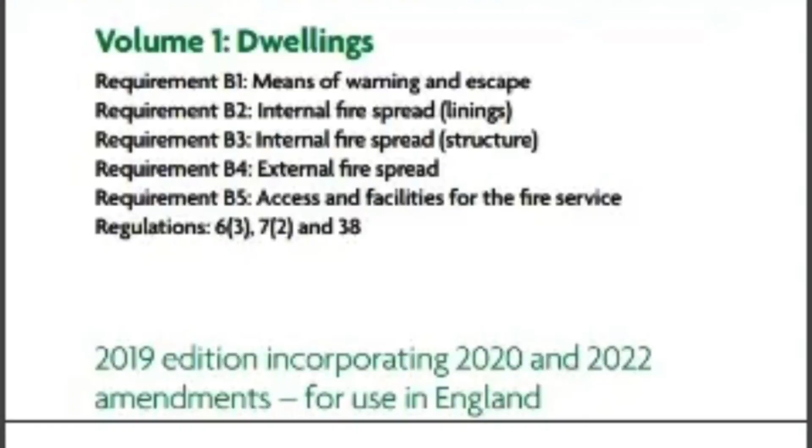Because of this disaster, the Building Regs Document B has been changed, so subsequently the gas regulations have changed, so we will need to follow those when we are installing gas appliances or pipework into multi-occupancy buildings. Now, inside this grey door here is the gas meter cupboard for this block of flats. So let's have a look here.

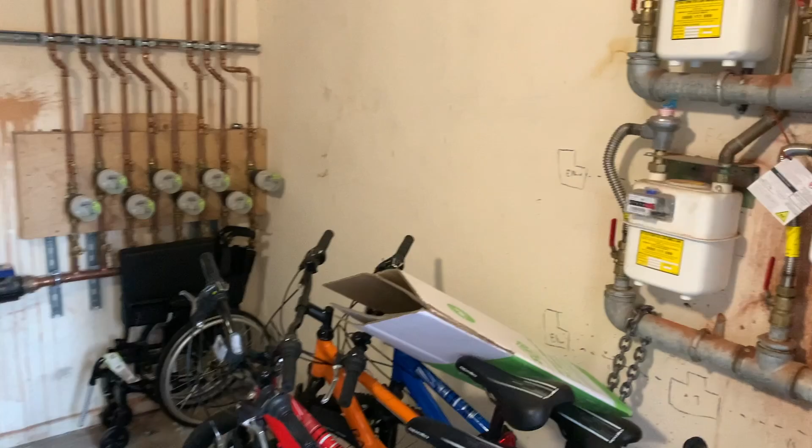Now, the first thing you notice about this door is there are no signs whatsoever on it to say that there are a load of gas meters behind this door. So the fire brigade wouldn't know the meters were here, or neither would our ESP or any meter readers. So first thing, now the door has to be lockable, which it is. And because it's lockable, anybody who has a meter in here requires a key to be able to get into this meter cupboard for their meters.

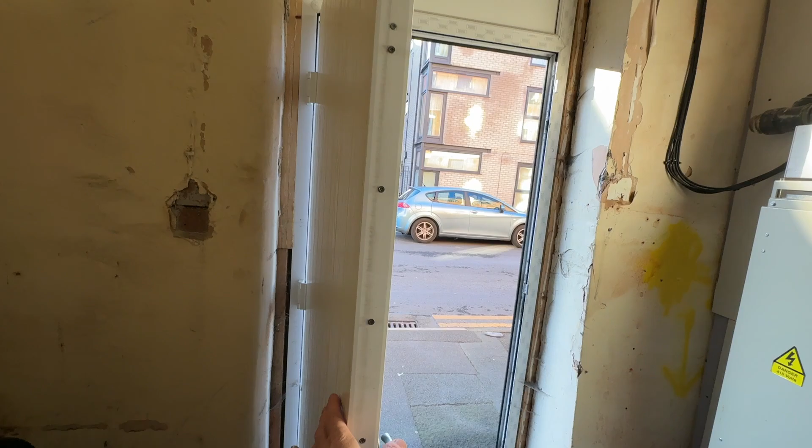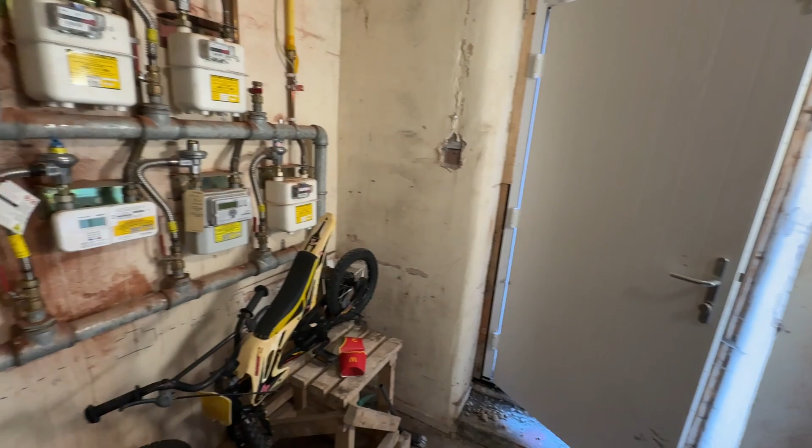As well as being lockable, this door has to be self-closing. As you can see, it's not self-closing. Also, in this wall here, we require ventilation. So let's have a look and see what size vents and how we work out the ventilation for this gas meter cupboard. Now, there are 2 ways of working out this ventilation for the compartment, cupboard, whatever you want to call it for the gas meters.

Now, the first way you can do it is 2% of the actual floor area. But if you don't really know the floor area, then they say you can use this chart, which they call the notional floor area, or you're guessing. So, first thing is, if we've got 2 gas meters, it says our notional floor area must be 0.5 meters squared per meter. So if we've got 2 meters, then that means we'll need 1 meter squared of floor area.

Now, 2% of this 1 meter squared, this is the way I worked it out. If you can think of an easier way or a better way, then stick it in the comments down below. Maths isn't my strong point, neither is English. But anyway, so this is the way I did it.

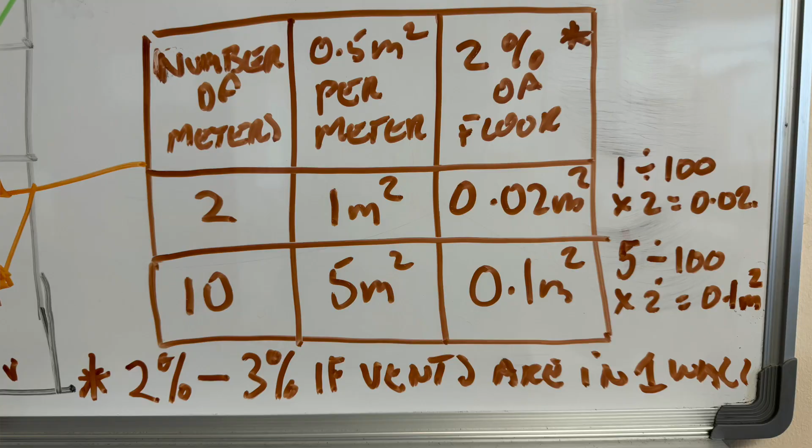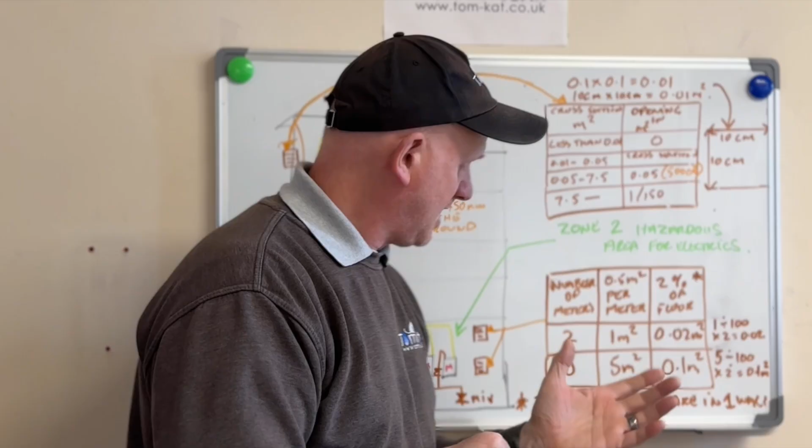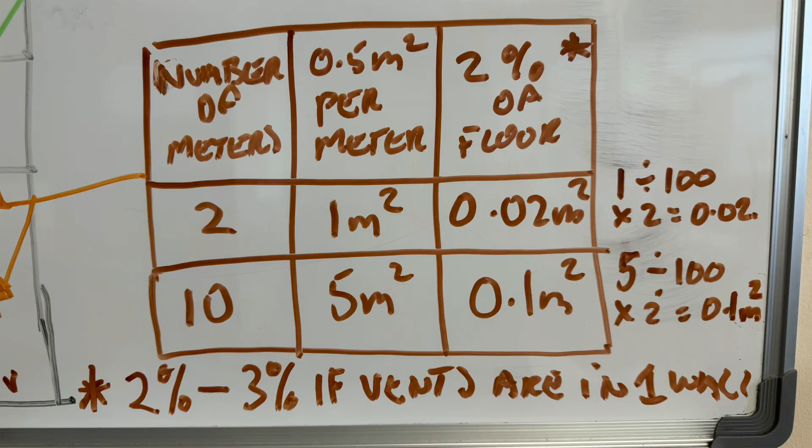1 divided by 100 times by 2 gives us 0.02 meters squared of free air. And then this can be split between these 2 vents. Or, say we had 10 gas meters, then we would do 0.5 meters squared per meter, which is 5 meters squared. Then we would do 5 divided by 100 times by 2, which would give us 0.1 metres squared of free air, which we would split between the two vents, top and bottom.

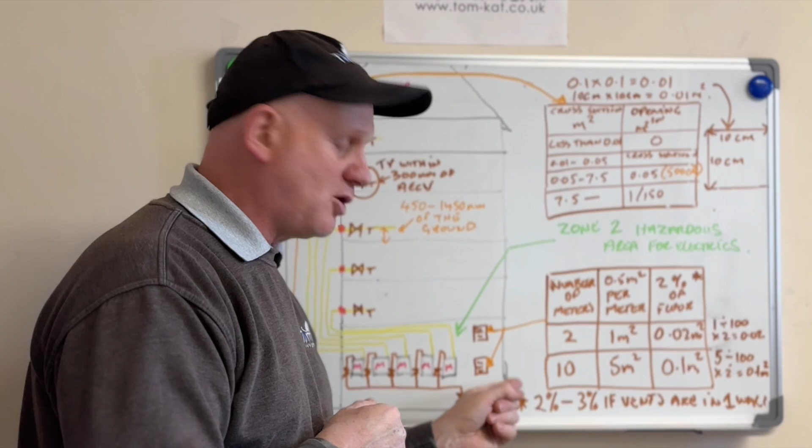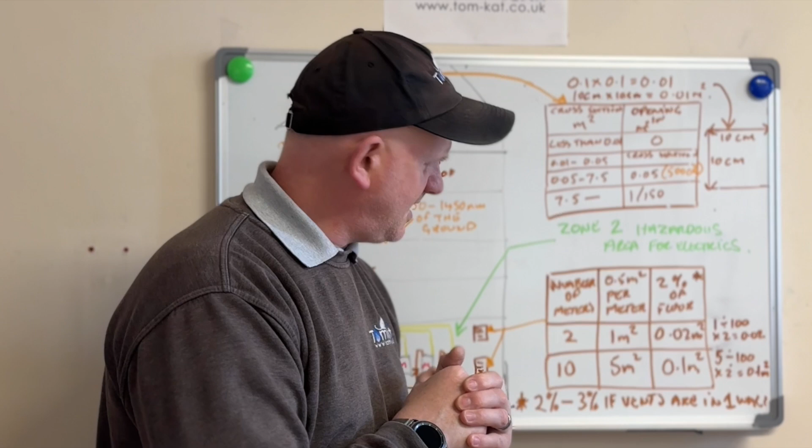Now, it does say if you can't get 4 vents, one in each wall, it then says up it from 2% to 3%. So if you've only got vents in one wall, up it to 3%. Now, hopefully, that makes sense.

Now you can see flat 6 is written on this meter, but if we go to this meter, there's nothing written on it. For some reason, there's a 94 on there, so that could be going to, I don't know.

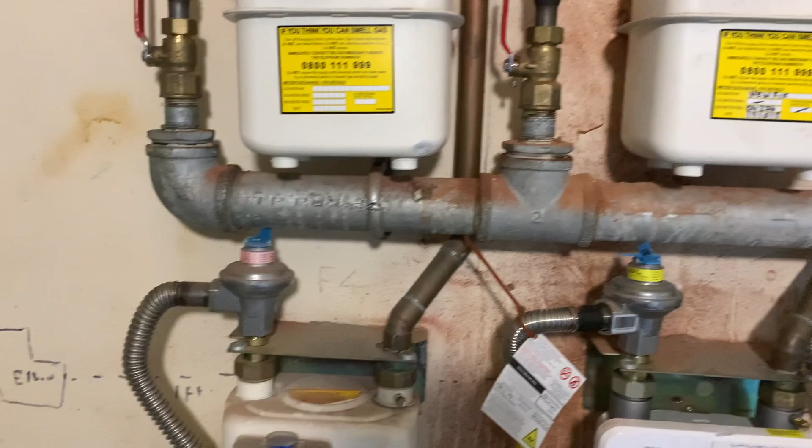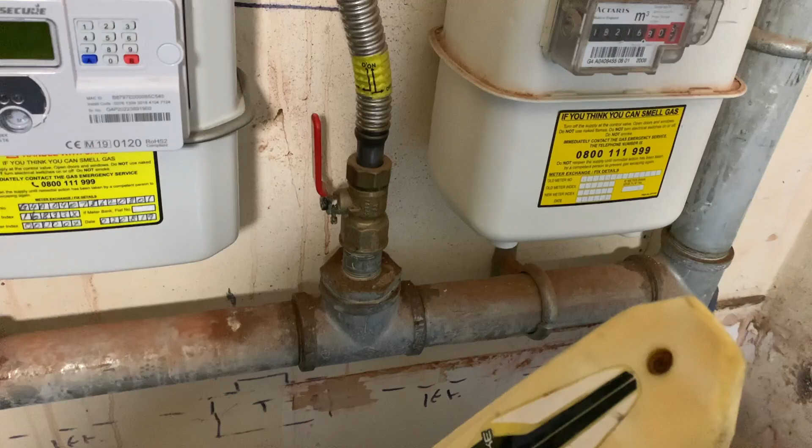Nothing on there, nothing on there, nothing on there, and nothing on there. There's actually nothing written on here except for that one flat to say which meter belongs to each flat. So each ECV should be marked up saying whose flat it belongs to, but there's nothing. There's no line drawing, there's no information, there's nothing on here saying any information whatsoever.

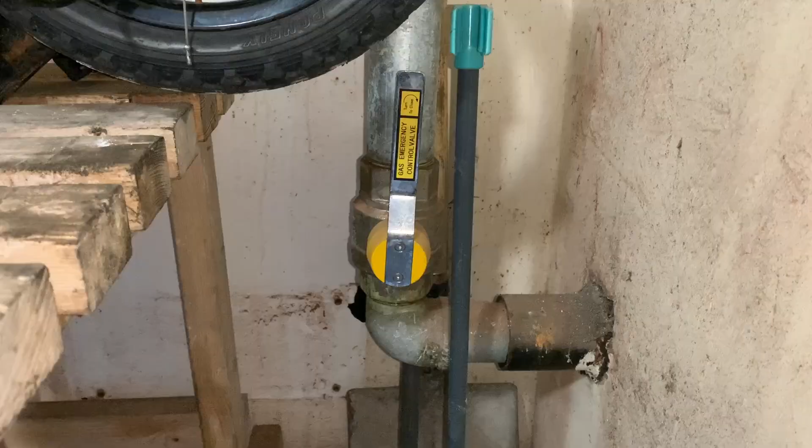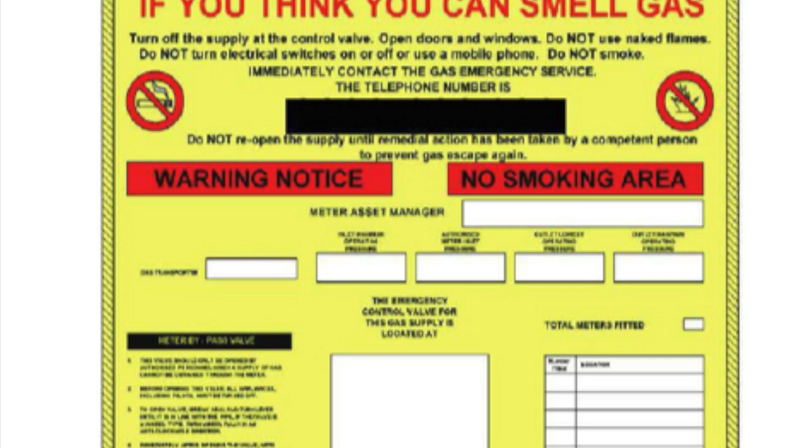So this is the meter inlet valve coming up to feed the bank of meters, but there are no signs whatsoever around here to give any information about the meter bank itself like there should be. So this is a good example of a comprehensive composite notice found in IGEM G5. The label for the bank of meters shall be placed in a prominent position and should be within sight of the meters and the ECVs.

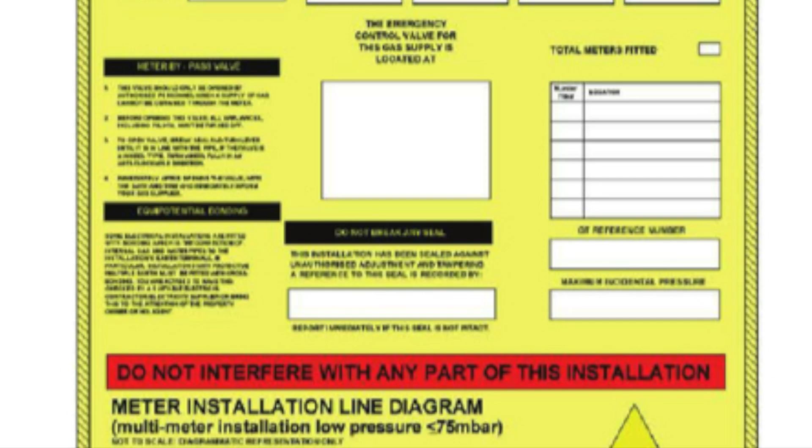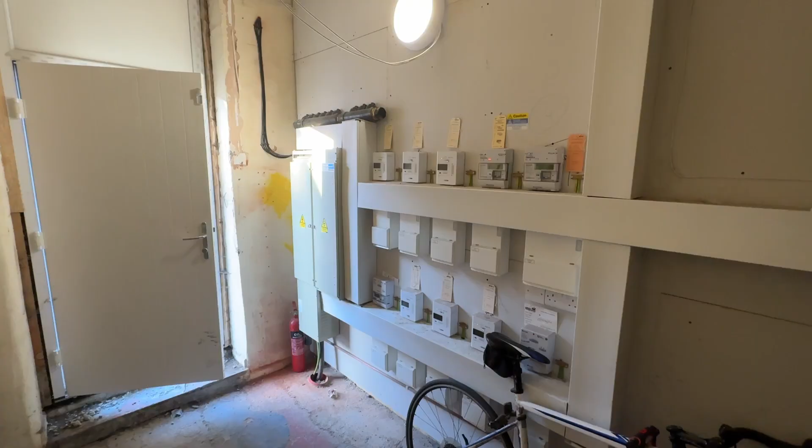The label should be provided with the following information on it: actions to be taken in the event of a suspected gas escape, a line diagram, the gas pressures, the equipotential bonding, the security seals, and no smoking and gas escape labels. Now you can see there's also a load of electric meters in this gas cupboard.

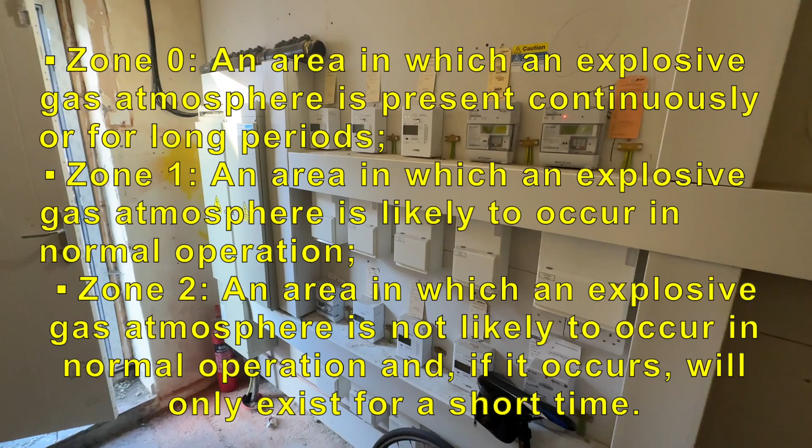So this electric side of it has to comply with zone 2. Now I ain't no electrician and I don't know whether all this complies to being able to be installed in zone 2 or not. So if you do know, let me know in the comments below.

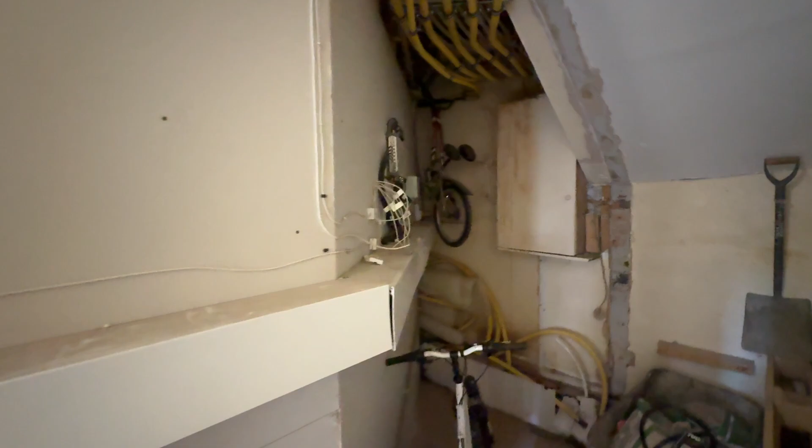But as you can see, the fire stops for this room are not very good. So you can see it's not sealed down the side there. We've even got bits of plasterboard missing, and the plasterboard isn't skimmed, so it isn't fireproofed anyway. And if we look round here, at the top here, I don't know whether you can see that, but let's go there, it's actually missing. So the fire resistance for this room is not that good.

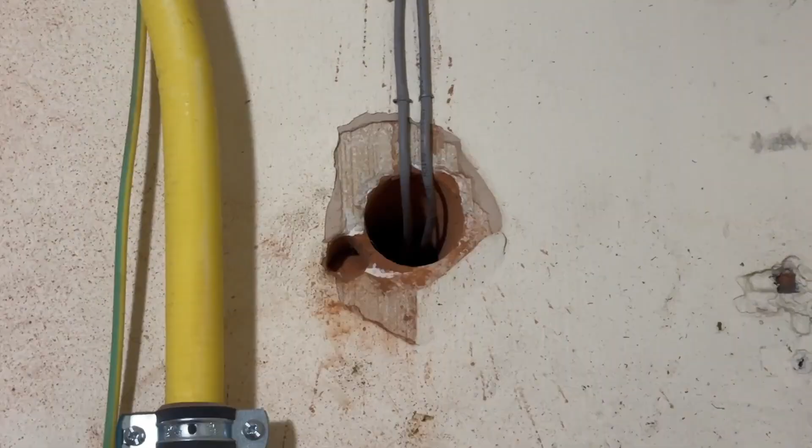And as you can see, some of the tenants like to leave their bikes in here. Can you use it as a store cupboard? I think not. And the water meters are also here as well, with the pipe going through. Now you can see there is an electric cable going through the wall there, which isn't fire stopped. There are more electric cables up there, again, which are not fire stopped, going through this room into the corridor.

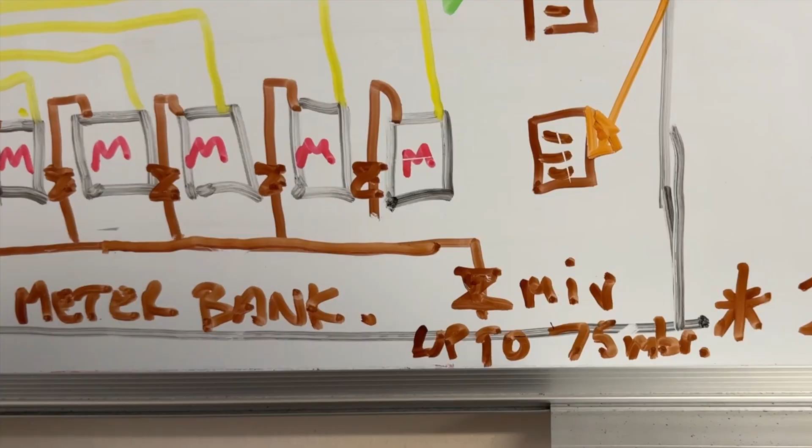Now let's take a look at the installation of the pipework and the meters. Now the first thing, the main coming in from the street should have an isolation valve on the inside of the meter cupboard. So this is what's called the meter inlet valve. There should also be one in the street as well, so you can isolate it in the street and here to turn off the meters. Also, because this meter bank is going to be internal, the incoming supply here from the street can only be low pressure, so up to 75 millibars, and not medium pressure.

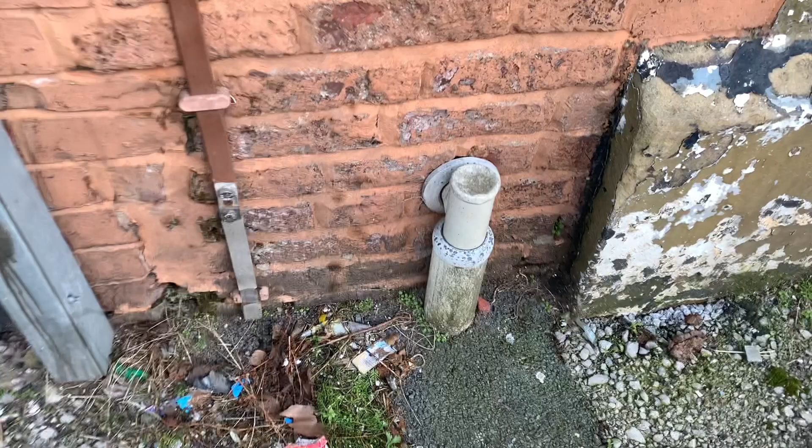So that is the main entry tee coming in, and if we follow the dug up bit, we can see there actually is a little access panel to get at the isolation valve in the street. So that's correct. Now when you've got 2 or more meters in a row, they're called a bank. So this is a bank of meters.

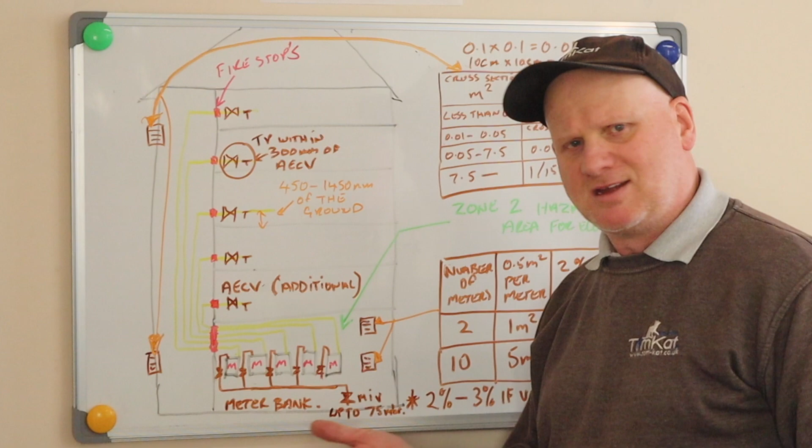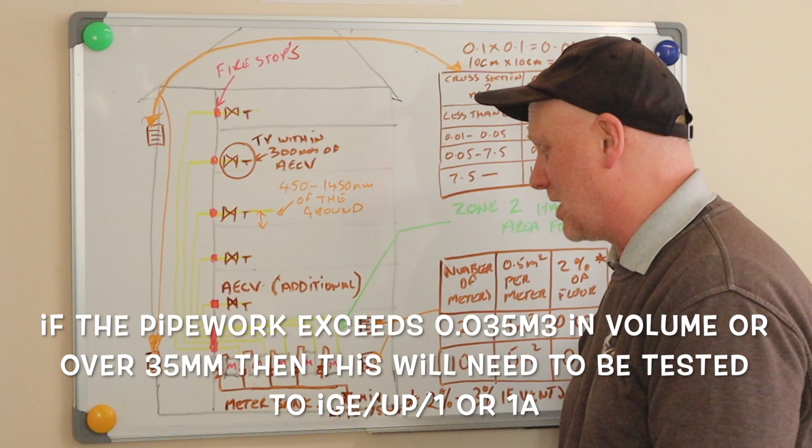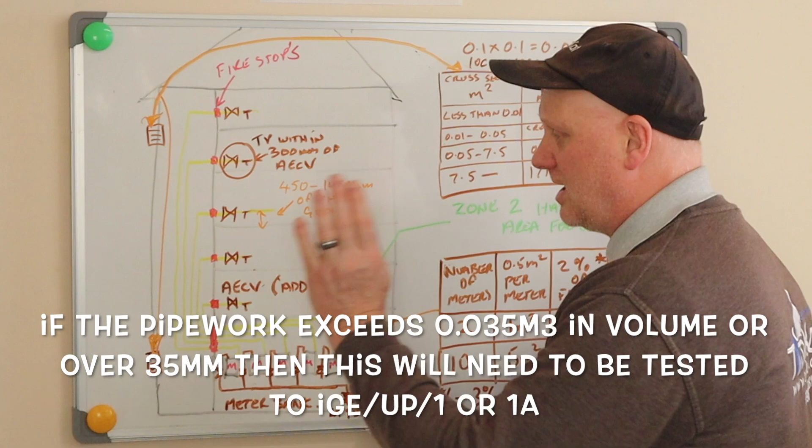So this pipework coming in here would be sized by the supplier, and the rest of the pipework here going through to the flats would be sized by the gas engineer doing the installation, or somebody who designs gas pipe installations. So this will say is sized correctly pipework coming off the meters and going off into a ventilated void on the side of the property. So the pipework comes through the main wall.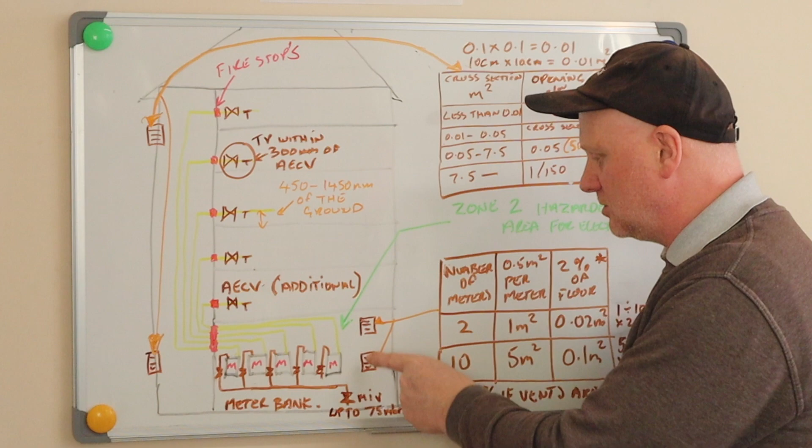Now this needs to be fire stopped, and also this room needs to be sealed, so if there was a gas escape then it wouldn't go through to any of the flats, it would just go through the ventilation which we've looked at.

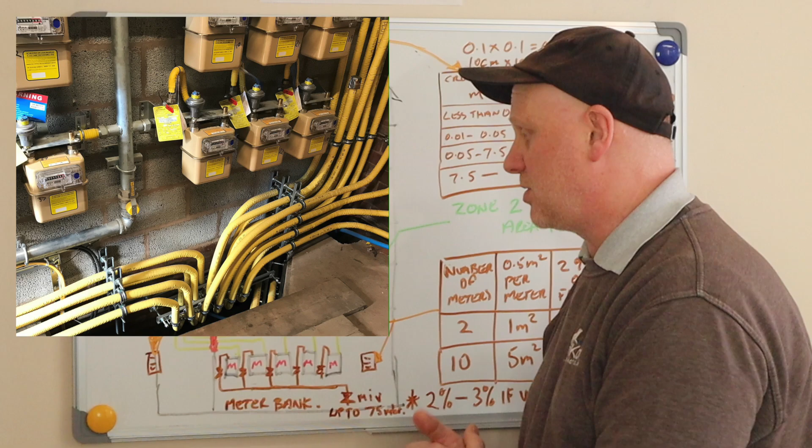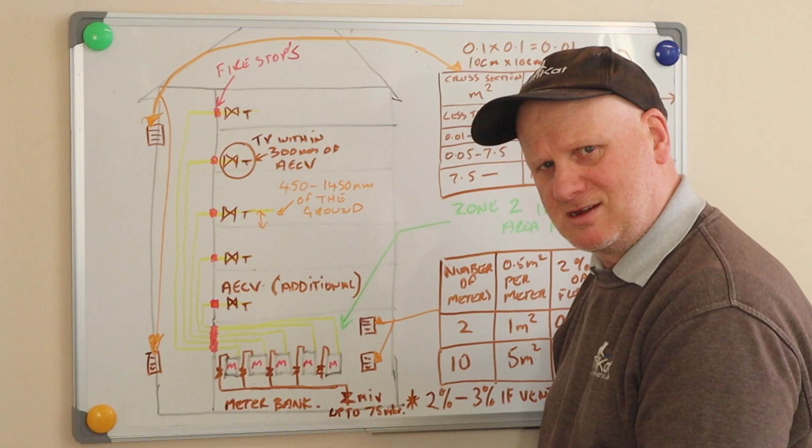So this pipe going through into this void, because once it's installed you wouldn't be able to get at it normally, it would have to be made of steel, which can be screwed or welded, or it could be made of corrugated plastic coated stainless steel tube, because it would be one continuous piece. Well, technically you could get away with copper if there was no joints in it. So I think in this installation you'd struggle. Anyway, we'll look at the sizing of the vents in this shaft a little later on.

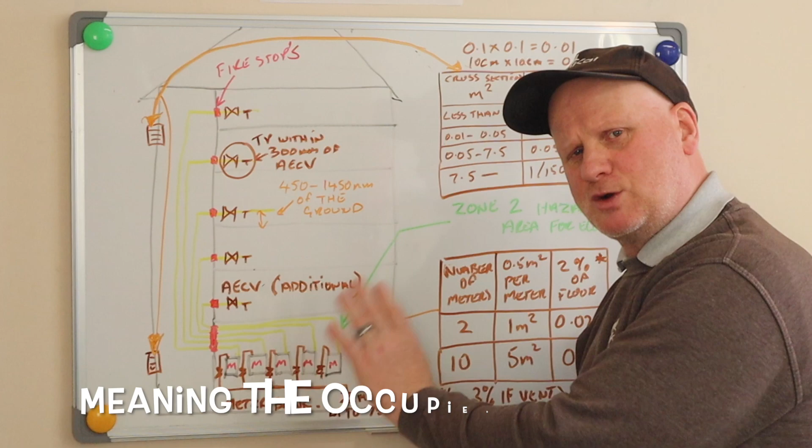Now, when the pipework comes into the flat, again, it needs to be fire stopped. Straight after as it comes in, it needs an AECV, or an additional emergency control valve. So you will have an emergency control valve still at the meter, but you will need an additional one in the flat.

Now, if they have 24-hour access to the ECV here at the meter bank, then if they haven't got an AECV, you would advise them to have one fitted. But if they didn't have 24-hour access to the ECV, then no AECV would be deemed at risk. Okay?

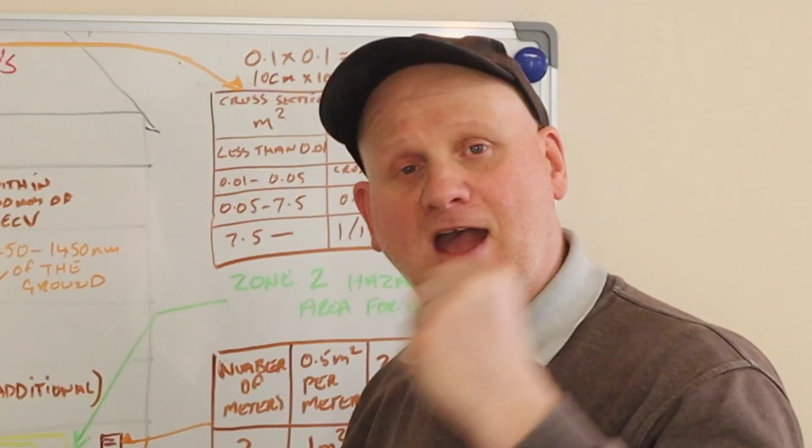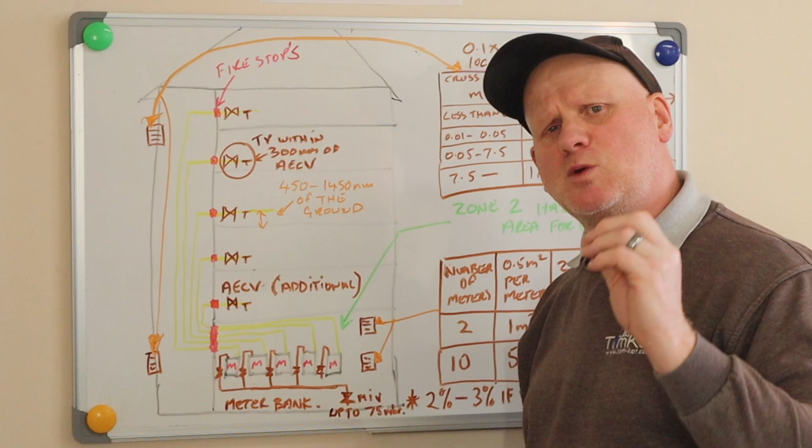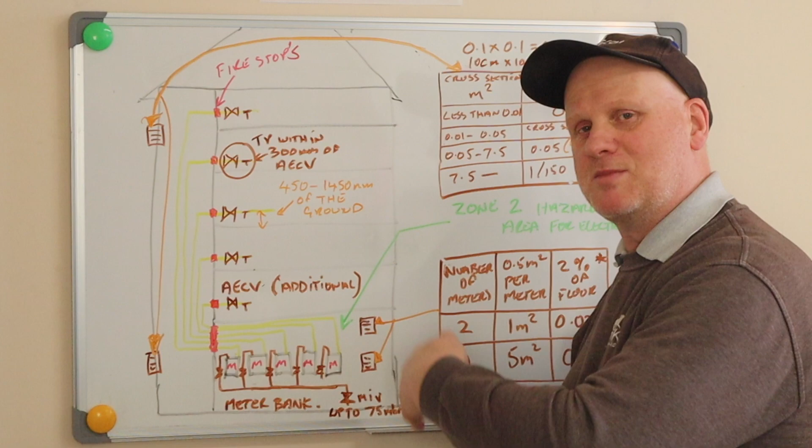Straight after the AECV, or within 300 mil of the AECV, we will require a test point. And that is, you could actually do a tightness test from there and test the house or the flat. So you could do one at the meter, or you could do one at the AECV. So it would make it easier to find leaks. So if you did have a drop here, then you could isolate these two and see if it's here, or whether it actually is in the flat.

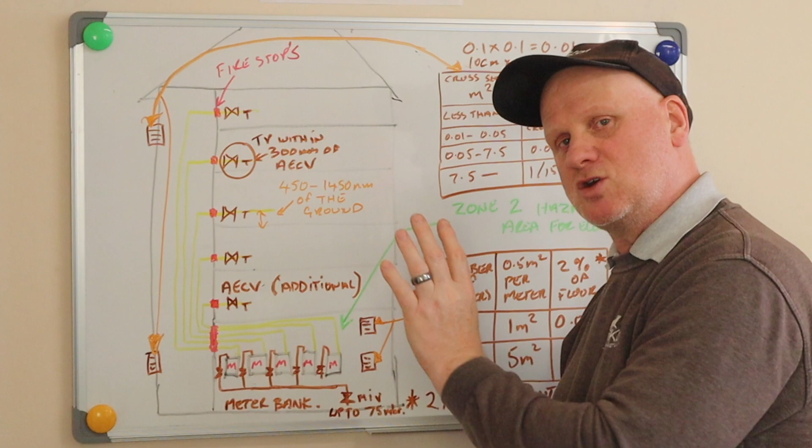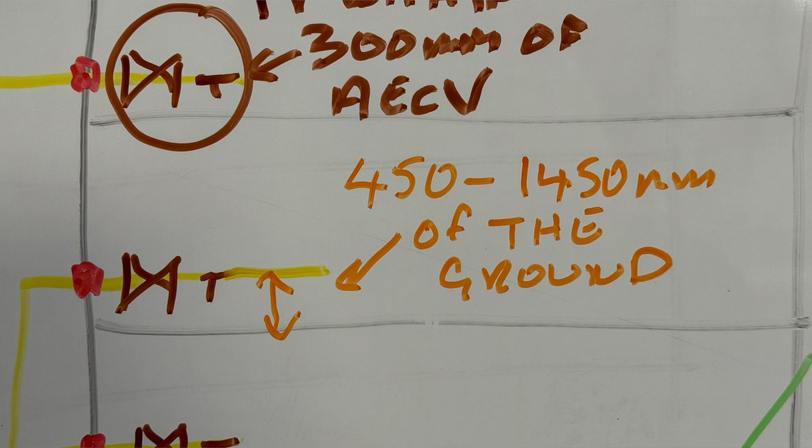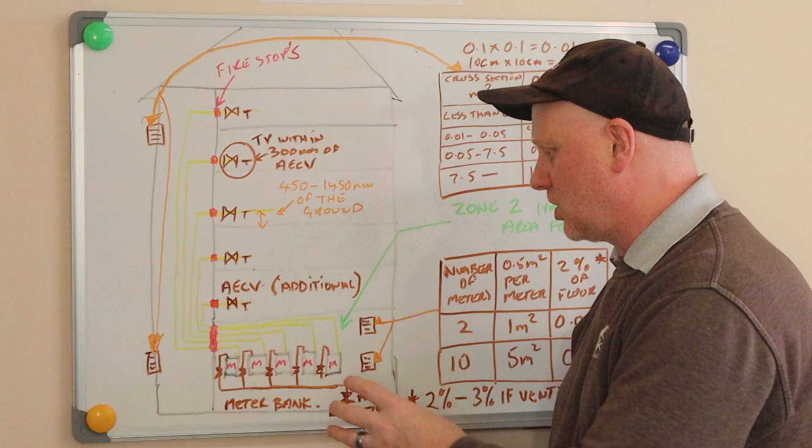Now, as well as the test point being within 300 of the additional emergency control valve, the siting of this emergency control valve is also important. It should be as soon as it enters the flat, or as practical as it can be coming into the flat. It needs to be within 450 and 1450 of the floor, because obviously if it's too low you're not going to be able to turn it off, and if it's too high you're not going to be able to turn it off. So that is the requirements for the pipework going into the flats from the meter bank.

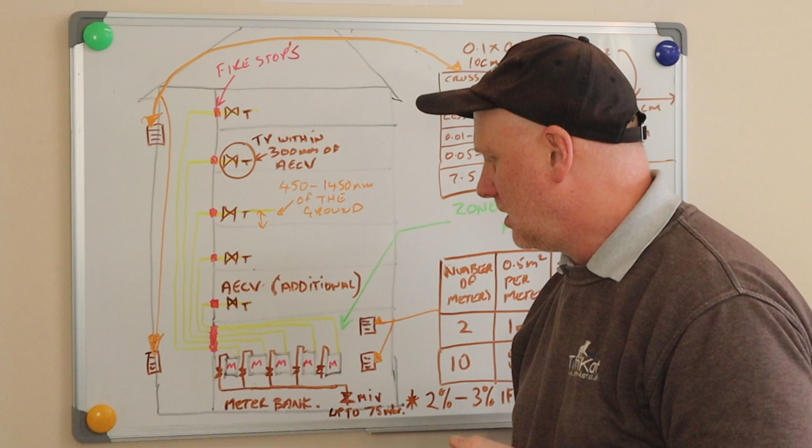Remember, this would need to be sized correctly, and this could end up being oversized for a domestic engineer to work on there, but if you did have your AECV in there, they could work back from that way. So hopefully that makes sense.

So what can we use as a fire stop then? Well, if a soil pipe or a waste pipe passes through multi-occupancy buildings, there are specially designed fire stops for them. Because the pipe is made of plastic, as the plastic melts, the fire stop expands. We also have the same with vents as well. We can have intumescent vents which do the same thing. As they're melting, they expand and they close off.

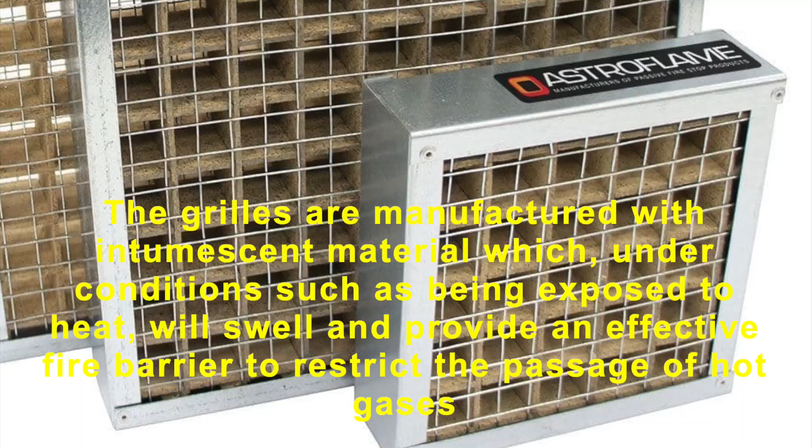But we have this stuff, flue jointing compound. So we can use this on the inside of meter boxes when the pipe passes through the back. This is the stuff we're supposed to be using. Now this will go up to 250 degrees centigrade, and it does say on the tin here it can be used as a pipe seal when a pipe passes through a wall.

I can't think of anything else you could use. High temperature silicone, would you be using that? Again, it probably depends on the temperature and whether local building control will allow it for a fire stop. But at the moment, that's the only thing I can think of to use for a fire stop.

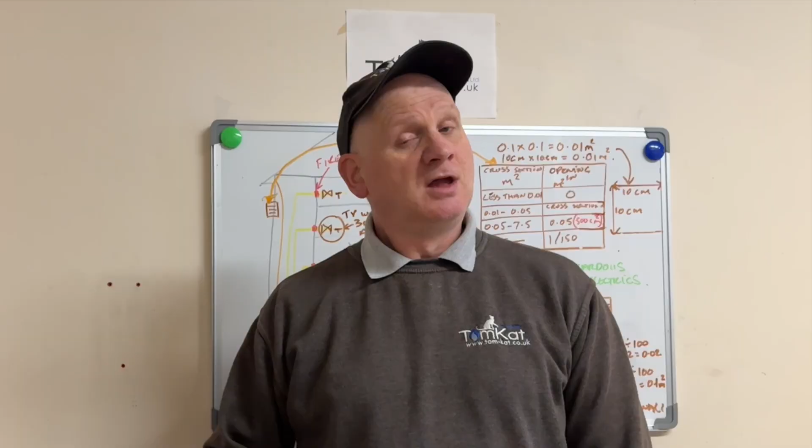So this has got double protection. So if this pipe did leak, it would then pass through the outer sleeve and then go back into the meter cupboard where it's ventilated, or should be ventilated, and people would then be able to smell it also. So that is what's meant as a pipe system for this corrugated stainless steel tube. Now, another way this can be achieved using the standard corrugated stainless steel tube, so the one that isn't the pipe system, is you could use this stuff.

So this is a flexible sleeve which would have to run the full length of the gas pipe, but the volume of this can't exceed 0.1 meters cubed. So there you go. That's one way of doing it.

Now, one product you cannot use in a ventilated duct or a sleeve is this. So this is gas MDPE, and this cannot be run inside the building. This is for underground purposes only. So don't think you're going to get a cheap fix by using this instead of using this pipe system.

My advice to you would be always contact your local building control before you're running a gas pipe in a new development. Make sure it complies, and always use this kind of stuff with the pipe system. There's quite a few manufacturers of this corrugated stainless steel pipe system now, and you can pick the one that suits you the best. So bear that in mind.

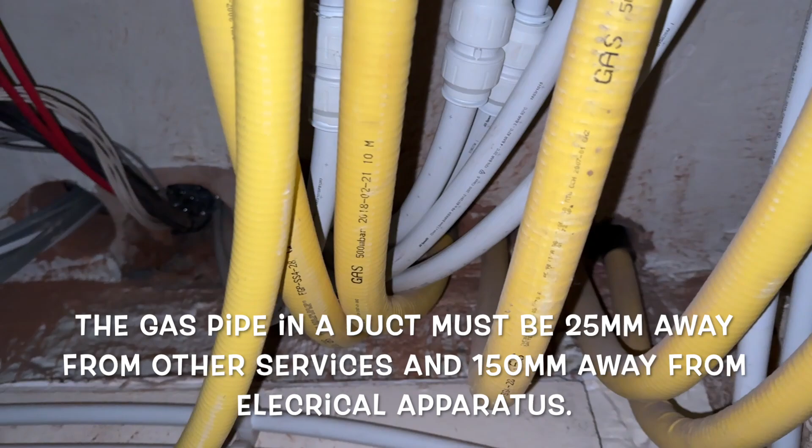So hopefully you can see here, this is where the TracPipe goes into the ducting, and also there's wires going in through the ducting as well. So are they fire stopped? No, they're not. Now this is the main staircase and landing and lobby for these flats. So this is what's called a protected area.

So any gas pipe installed within the stairwell, the lobby or on the landing must be in a fireproof protected shaft, which is ventilated direct to outside. Now, the TracPipe we saw downstairs is installed in this boxing in, which you can see is not ventilated at all.

Now, if this pipe is steel, screwed or welded, and continuous copper, or TracPipe, what they could have done is just put vents here, top and bottom, because this area, because a high volume of traffic comes here, they call it an occupied area. So if it was to leak, people would smell it. But also what they could have done was put two vents here, and also this wall here is an outside wall, so they could put vents in there as well.

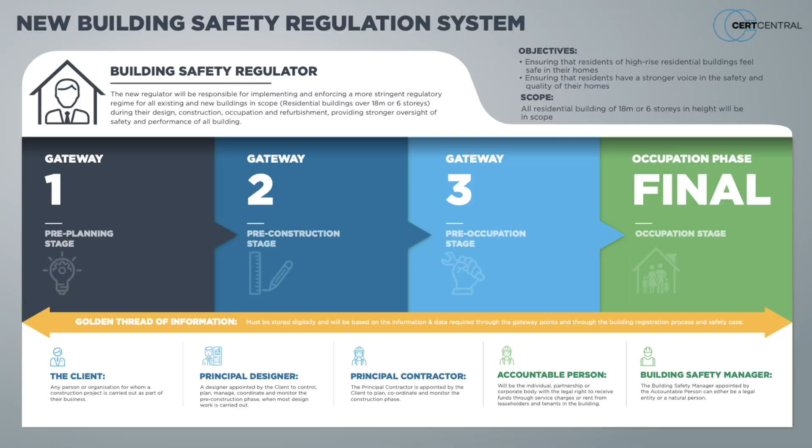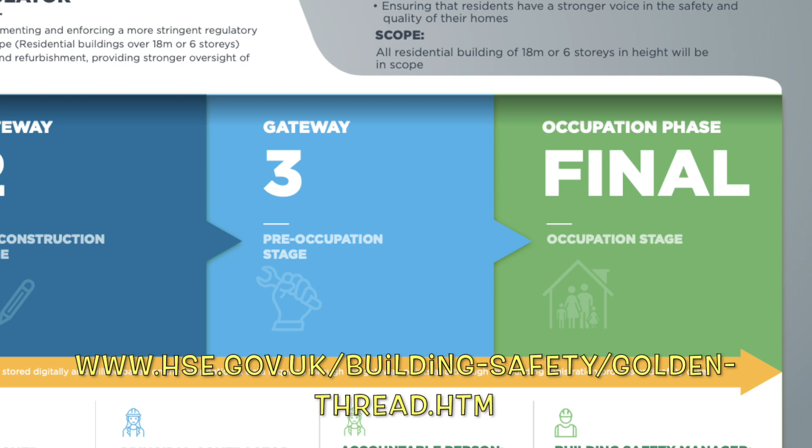Now, if you're unsure about any of the regulations required when you're installing gas pipes into flats, especially in the protected areas such as stairwells, lobbies and landings, then you can ask the accountable person for the golden thread information on the property. So what is this golden thread thing then? The golden thread involves keeping a digital record of crucial building information, starting from the design phase and continuing through the building's life cycle. The government have decided that the golden thread of a building's information must be stored digitally, but this can be on multiple systems.

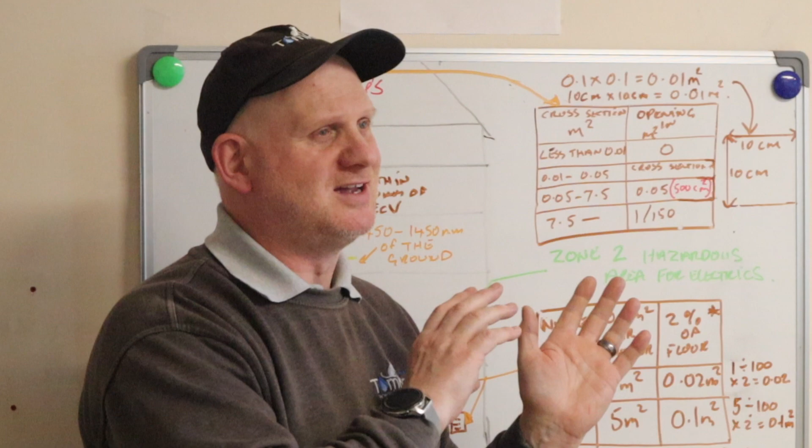Now let's have a look at sizing these vents in this pipe duct. Now, one thing to bear in mind is the ventilation we're actually sizing is not there to get rid of the gas if we have an absolute failure of the gas pipe, so catastrophically failing. It's only there if you've got like a small gas leak, so it allows the gas to escape and so people can smell it.

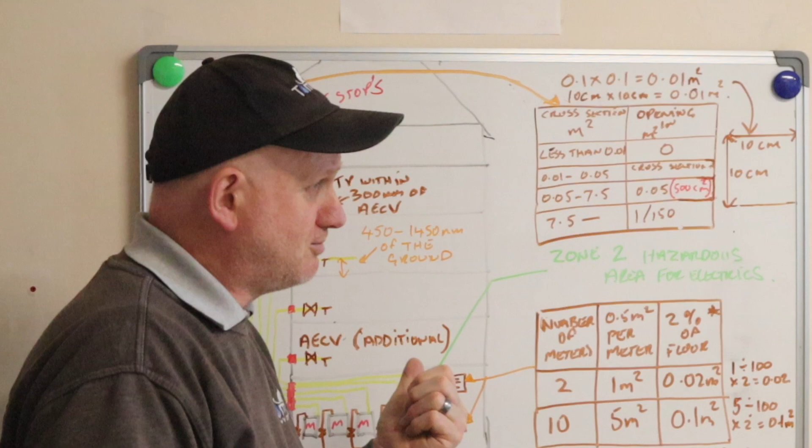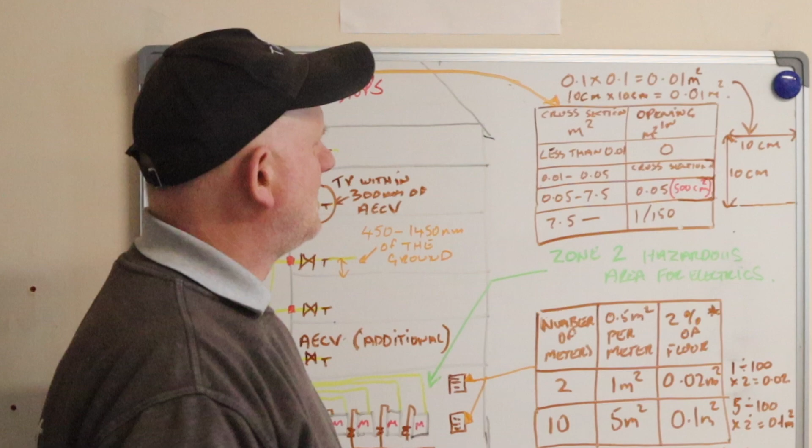The same goes for the vents here as well. This isn't designed for if there was a catastrophic failure of the gas in this meter compound, cupboard, whatever you want to call it. It's just there to warn people and hopefully stop an explosion. Anyway, this is how you do it. Now, for some reason, one, we do it off the cross-sectional area of the duct, and two, they've done it in meters squared.

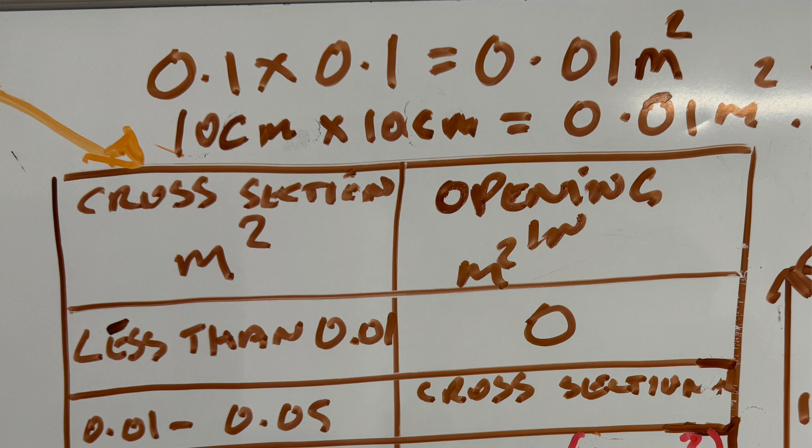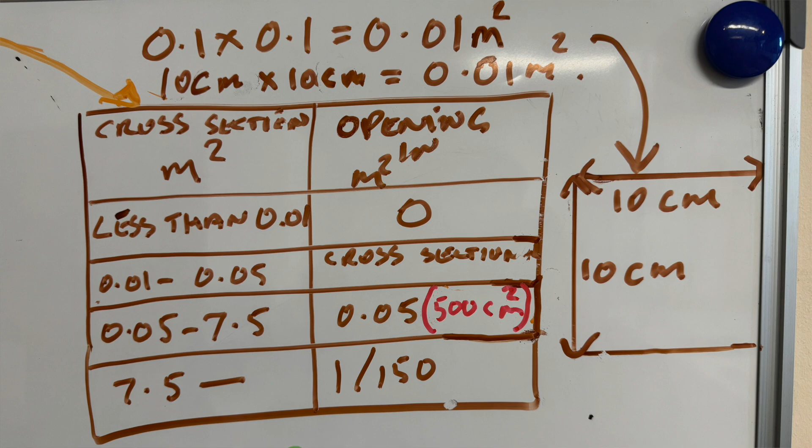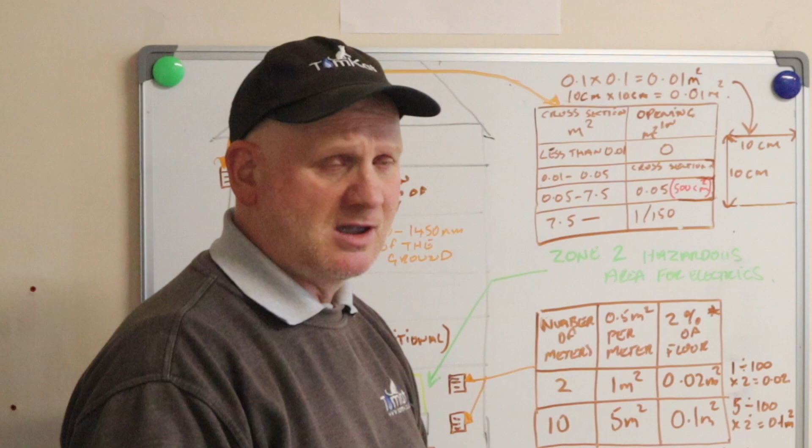Anyway, if your duct is less than 0.01 meters squared, then you don't need any ventilation. But how big is 0.01 meters squared? Well, technically, it's a little box which is 10 centimetres by 10 centimetres, or 100 mil by 100 mil. So that is actual size. So if your pipe duct is bigger than that, you're going to need ventilation. Now remember, it's not the length of the duct, it's the cross-sectional area of the duct.

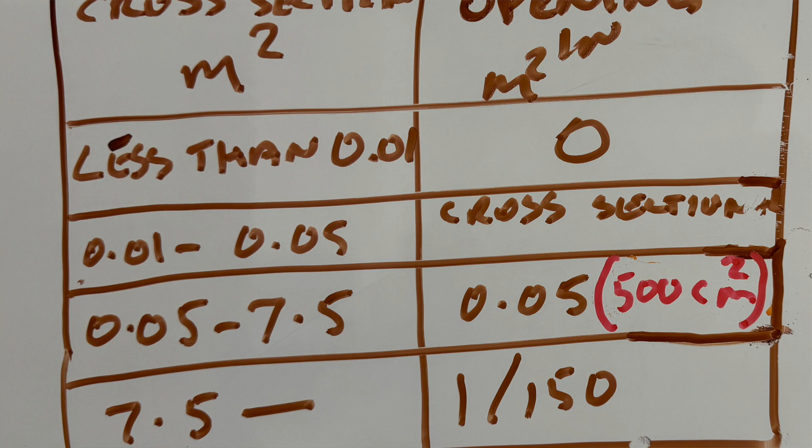If your duct is between 0.01 meters squared and 0.05 meters squared, then we go off the cross-sectional area of the duct. So how big your duct is will determine how much vent you have, top and bottom.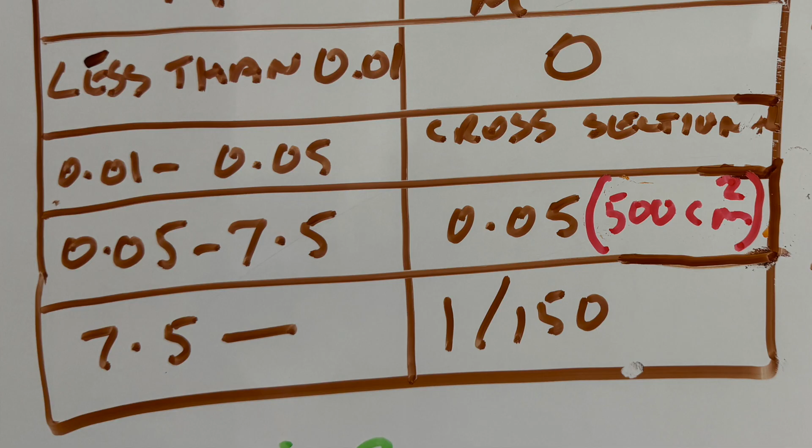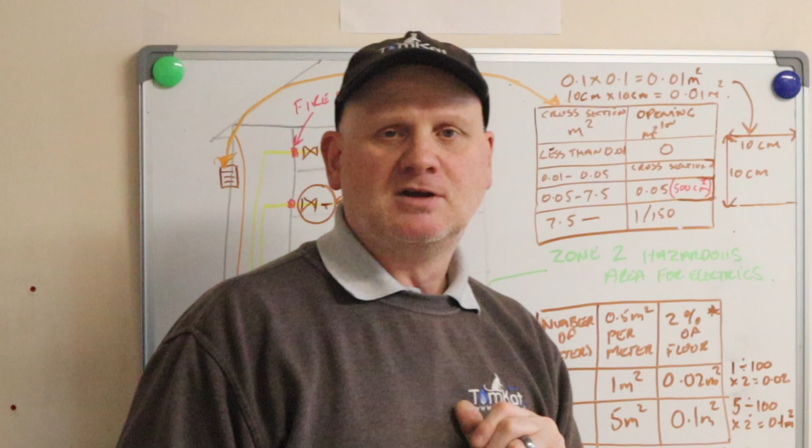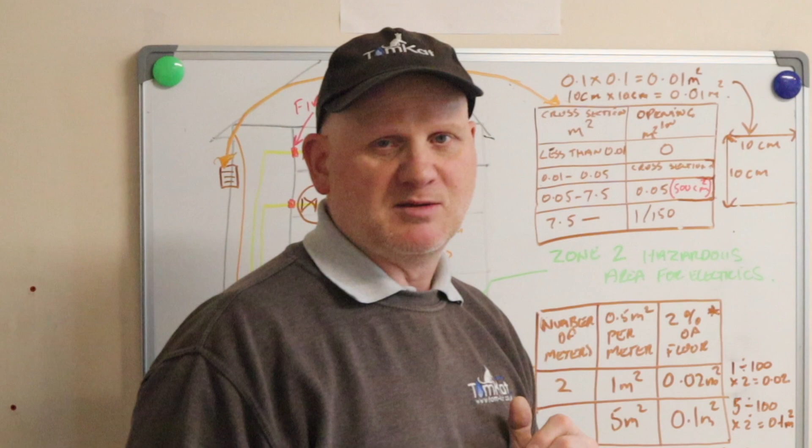Now if you're between 0.05 and 7.5 metres squared, then it's 0.05 metres squared of free air you need, which is equivalent to 500 centimetres squared. And if you are above 7.5 metres squared in your duct, then you need 1/150th of the cross-sectional area of the duct. So basically you're dividing it by 150 to get your metres squared. So that is how we size the ventilation for this duct.

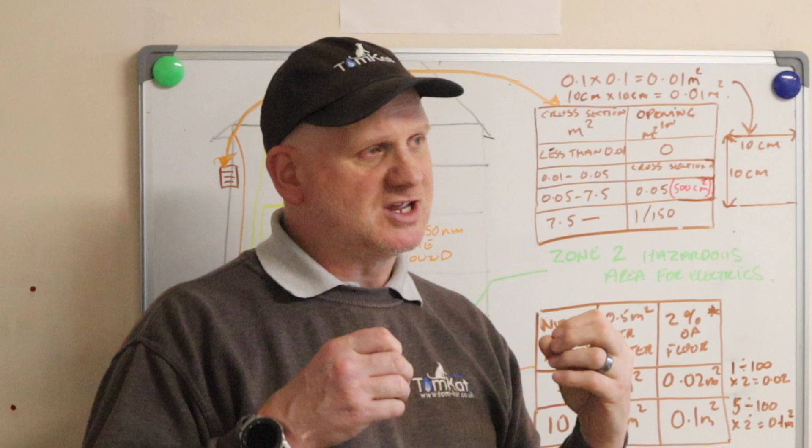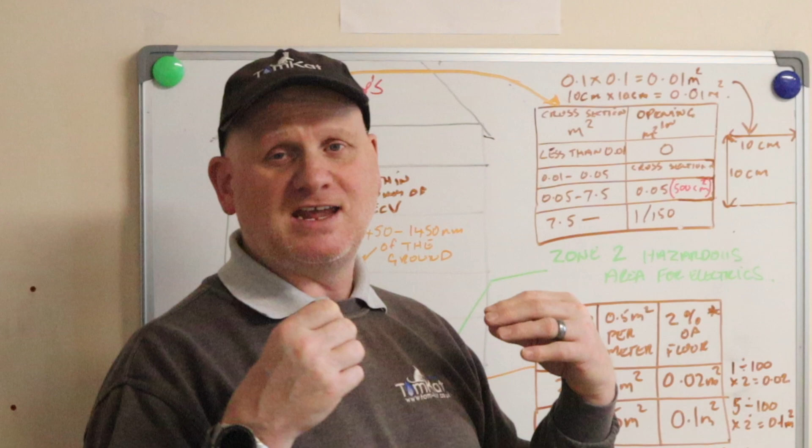But remember, this is just so it clears any little spillages of gas. It's not there for any catastrophic failure of the gas pipe. That's why we can't have any joints. Hopefully that makes sense. And if you're thinking, I can't be bothered with all that, then obviously you could run the gas pipe outside. It might look horrendous and it might be open to being stolen, but it's a hell of a lot safer. Now let's have a look at gas appliances being installed in these multi-occupancy buildings.

Let's first of all take the 5 stories, 11 metre flats. If you're installing these gas boilers, then you can use the standard flue system for a condensing boiler, and that would have a plastic internal flue for the products of combustion. Now if you're going above the 11 metres, so the 18 metres, the 6 stories, it's a different matter. You cannot use a standard flue system with a plastic internal flue system.

Now, some of you may remember way back when condensing boilers first came out in 2005, well, just before 2005. Then we were using this type of flue system, and the inner part of the flue, like we've got here, is aluminium. This is off an old Ideal, but anyway, you can use this flue system above the 18 metres because it is aluminium, and according to Approved Document B, and in accordance with BS EN 13501-1 2007 plus A1 2009, aluminium is classed as an A1 fire resistant product.

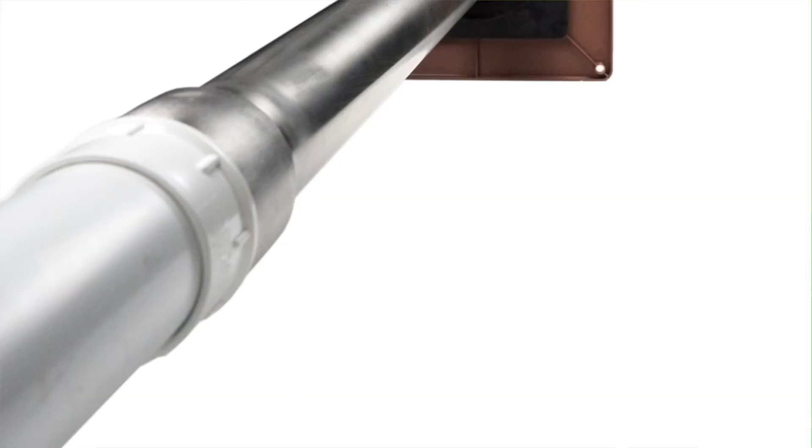But we all know what happened to these flue systems. They corroded. So most of the major manufacturers actually make one of these flue systems for high-rise flats. Now Worcester are using the aluminium, but I did find that Keston, on their Keston twin flue system, are using stainless steel, and I have found that Vaillant are using a stainless steel system too. So some of the manufacturers are using aluminium and some of them are using stainless steel, and they are quite pricey.

So if we're in the multi-storey flats over the 18 metres, all the flues have to be class A1 flues, aluminium or stainless steel, fire resistant, even the lower floors. So you can't do up to the first 5 floors in plastic and then over that in the aluminium. They've all got to be aluminium. So that's something to watch out for.

And again, just remember guys, if these flues were installed pre-Grenfell, then they're not going to comply to these new standards, because these standards started to be looked at in 2018. So you could say post 2018 we're going to need aluminium, but pre 2018 you would be advising the responsible person about changing the flues. But obviously if you're installing a new boiler, it will need to comply with the new standards.

So let's have a look at cookers. The first thing is the cookers have to have flame supervision devices. So basically thermoelectric devices like we've got here on this hob. So it's got to have a safety device, so if the flame gets blown out, it will turn the gas off.

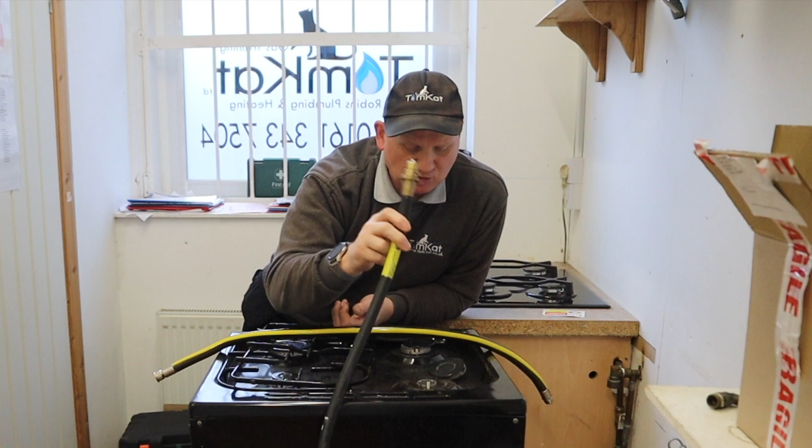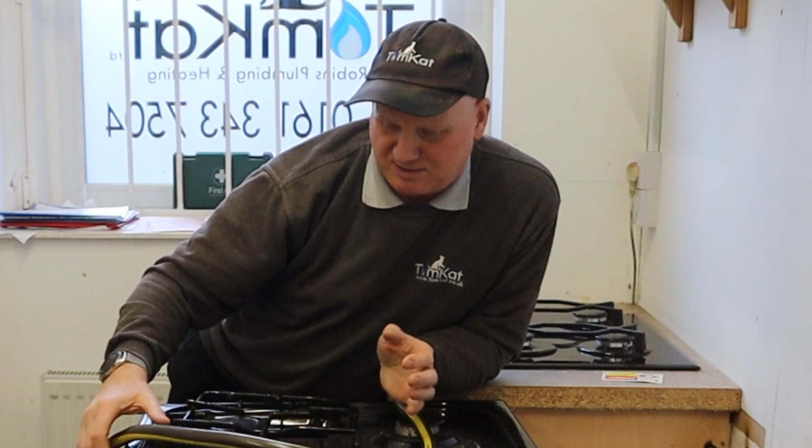Cooker hoses. Now this cooker hose is to BS 669 Part 1. We can't install these cooker hoses in multi-occupancy buildings. They've got to be cooker hoses like this, which is to BS 14800. Now this is a straight through one, which we don't use. You can get ones of these, but these are the cooker hoses you have to use in multi-occupancy buildings, to BS 14800.

Now, if you do go to a block of flats or a maisonette or whichever multi-occupancy building, and the cooker does not have flame supervision devices, and the cooker hose isn't manufactured to the correct British standard of 14800, then you would deem it not to current standards, and you would advise the responsible person to have them changed.

But obviously, if you are installing a brand new gas appliance in a multi-occupancy building, easy for me to say, you cannot install it not to current standards. So the cooker has to have flame supervision devices, and the cooker hose must be to 14800. So that's my look at the installation of gas appliances and gas pipework in multi-occupancy buildings.